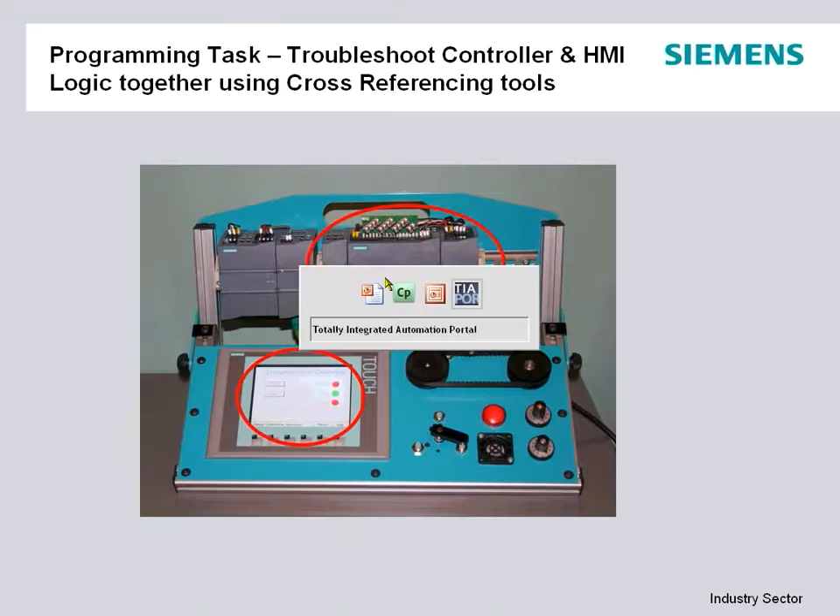To get started, our programming task for today is going to troubleshoot the controller and HMI logic that we previously developed in the prior parts to this videocast series. And we're going to be able to cross-reference them together, not only offline but online as well. To show you how we do that, we're going to open our existing project that we've been developing in the previous parts, Project 1. And this has both logic for the controller and visualization for the HMI.

In this particular case, we're just going to go right into our PLC program and go right into our main block. And then from this point, we can look at what we've developed and see where it's being used in other parts of the system-wide project, not only in the logic but in the HMI. And from here, our start-stop seal-in circuit that we previously did, we can go to Info and then to Cross-Referencing and click on any one of these elements and see where it's used.

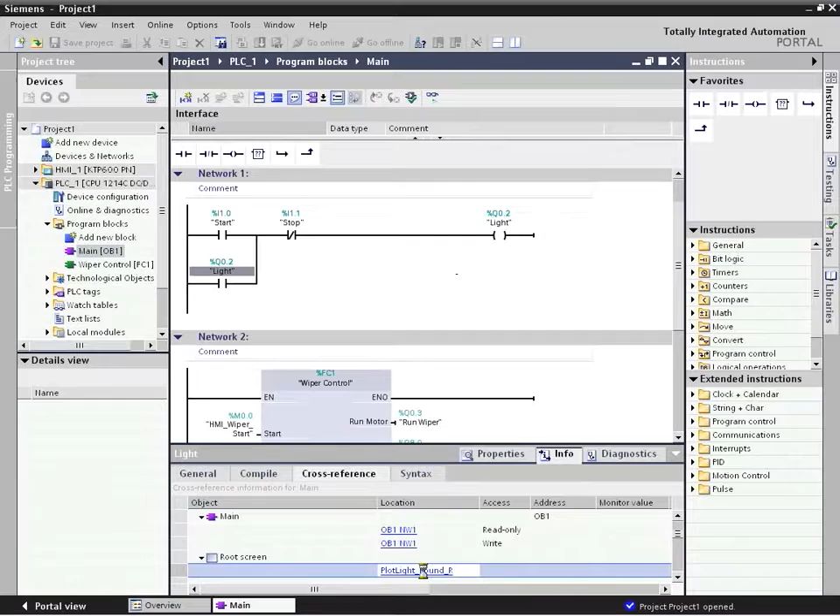And you can see we got it here, here, and then as well it's a pilot light on our root screen of our HMI project. So if we click on that, it's all context-sensitive hyperlink. It goes right to the HMI project and highlights it and provides the properties, accessibility for anything we want to change on that particular element. So, if we had a problem that we wanted to reassign a tag or anything like that, we can do that as well.

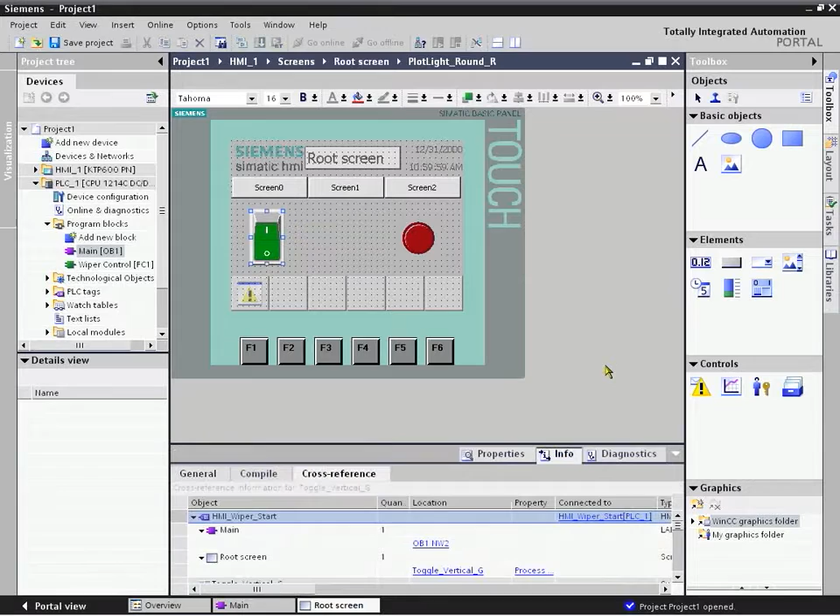Similarly, from the HMI, we have this toggle switch, and we can click on its info and its cross-reference, and we can see that it was linked to this particular network 2 in our main project, and that was where our HMI start tag was being utilized on this wiper control library.

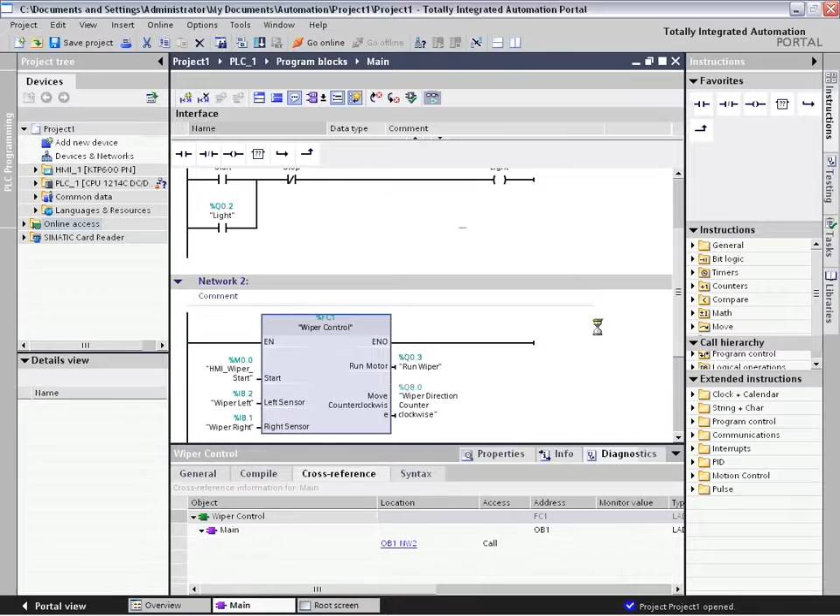We can also do this online by clicking on the online monitoring glasses, and it's going to link to our controller and our HMI both at the same time here. And we can see where the elements are being used. We can highlight the power flow and continue with the cross-referencing capability that we showed you online as well. So in our start-stop seal-in circuit, we can start it.

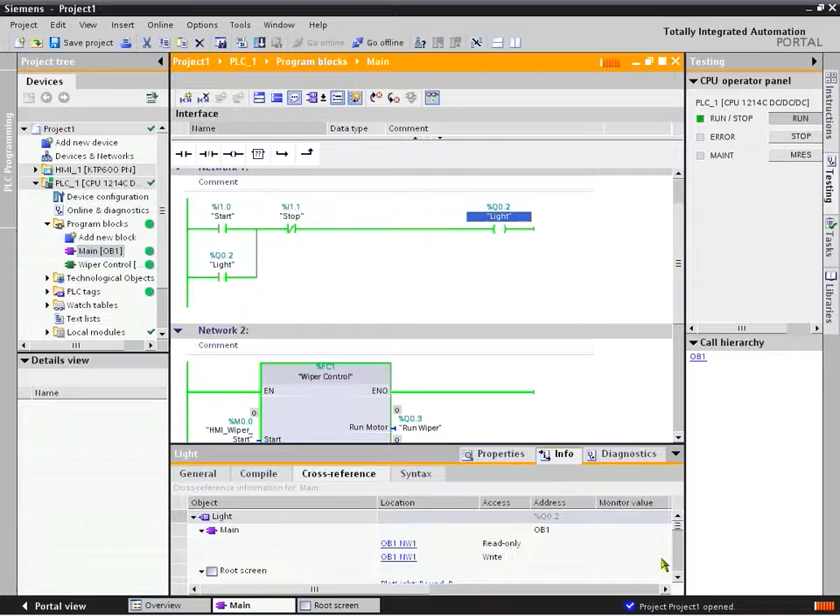If the light goes on, we can see that on our runtime screen as well if we choose. And then we can cross-reference it over to where it's being used in the HMI, in the screen there. As I mentioned, we can use the screen in runtime on the PC itself. So it has simulation capability right on the PC for the screen project, and we can see that it's illuminated. So you've got a lot of powerful debugging tools, right at the software connected to the controller without having to use the devices in the machine or system by themselves.

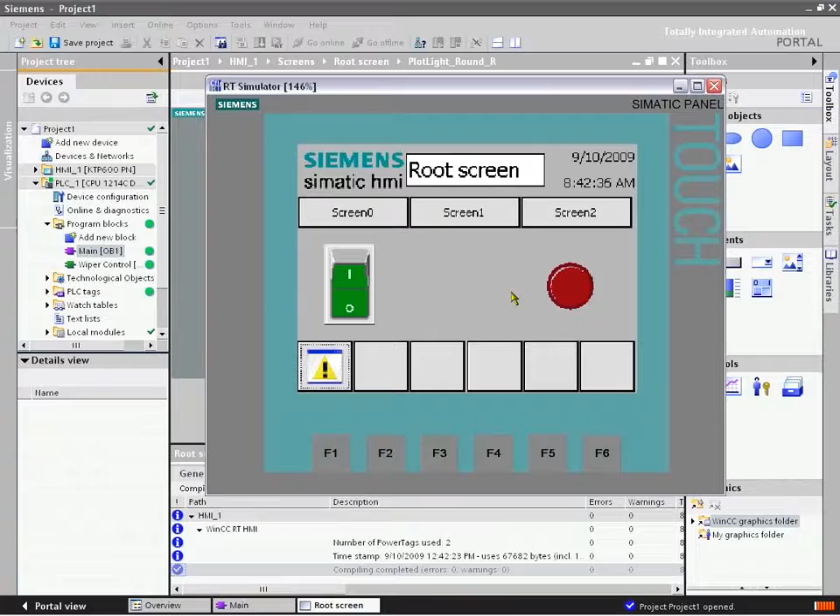Additionally, we can control the wiper, as we mentioned. We can toggle back to the project. We can see that it is activated here. Its info and cross-reference are all back to the root screen. It highlights that in the offline mode, and we can make any changes we want there as well.

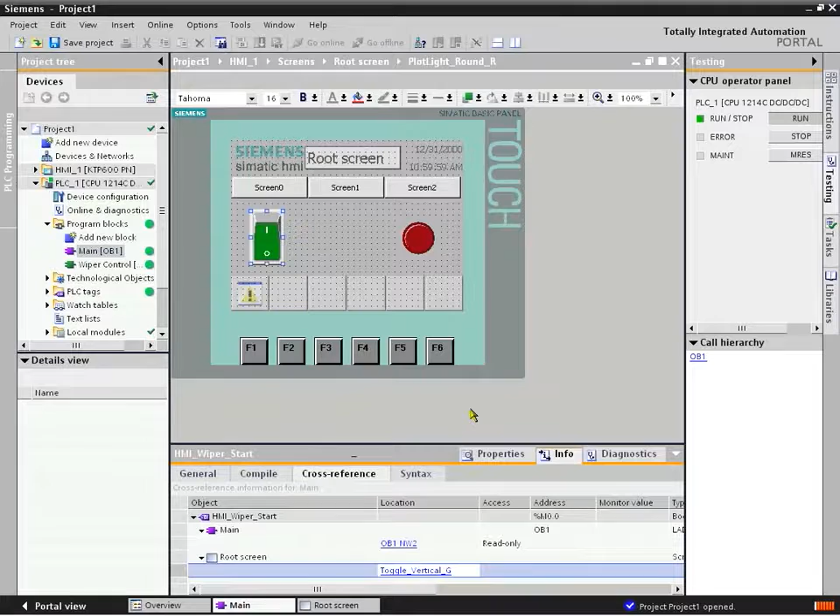So, the benefits of the project-wide cross-referencing in our Step 7 Basic software for the S7-1200 include the capability to troubleshoot the complete controller and HMI logic together. No time-consuming opening and closing of separate development applications, separate software packages to find out where your problem is in startup of a machine or a process.

All hyperlinked tag usage of all the tags in the controller and the HMI screen, easily navigate between the two to duplicate any troubleshooting problems, saves a lot of time and cost for the efforts in going to two development softwares for those tasks. User-friendly software, very intuitive, easy navigation, reduces the possibility of errors in typing.

System-wide, it's one programming software, one user program for logic, HMI, and networking. Greatly reduces engineering time, costs, much easier to maintain and reuse logic. As with all Siemens products, the S7-1200 included, and the Step 7 Basic, it's a global product line, worldwide approved, accepted across the industry. The S7-1200 is designed on S7 core technology, so it's future-proof, sustainable, easy to migrate, standardize, and benefit.